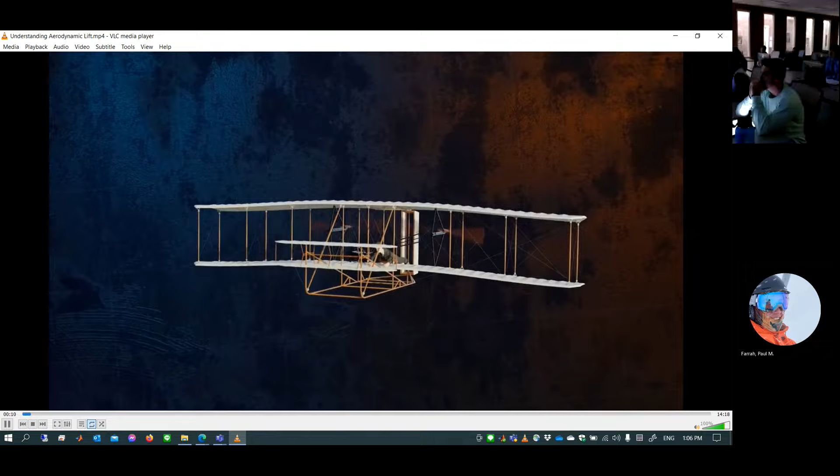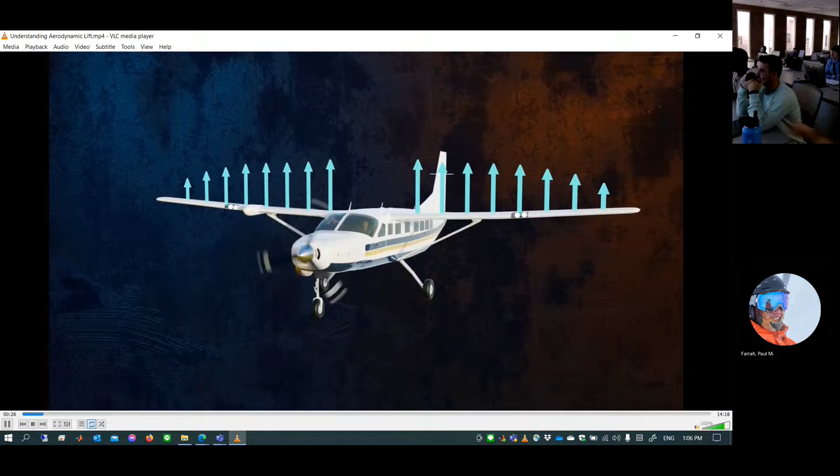Since well before the first Wright brothers flight in 1903, and all the way to the present day, mankind has been fascinated by taking to the skies. Once thought to be impossible, heavier-than-air flight is only a reality because of the lift generated by aircraft wings. But lift is a complicated topic, and even to this day engineers have lengthy debates about how it's created.

So what exactly is lift? When fluid flows past an object, or an object like this plane wing moves through a stationary fluid, the fluid exerts a force on the object, which can be split into a component acting in the same direction as the fluid flow, called drag, and a component acting perpendicular to the flow direction, called lift.

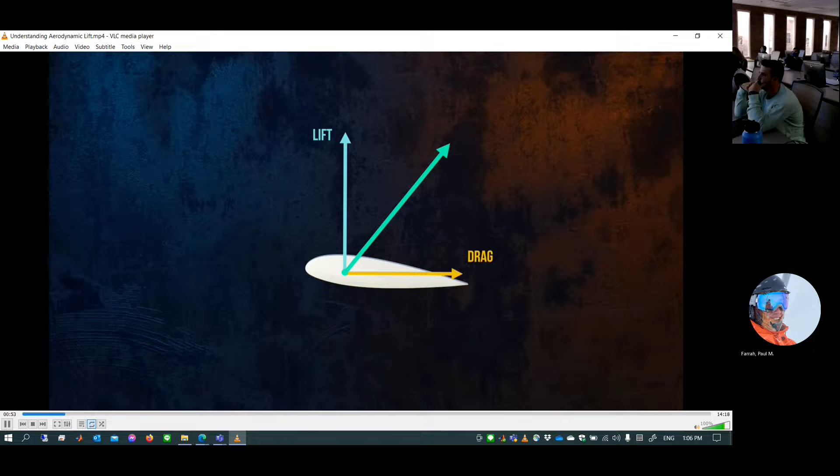When talking about lift, we're mostly interested in streamlined bodies like this airfoil, which are carefully designed to produce a lot of lift, but to minimize drag.

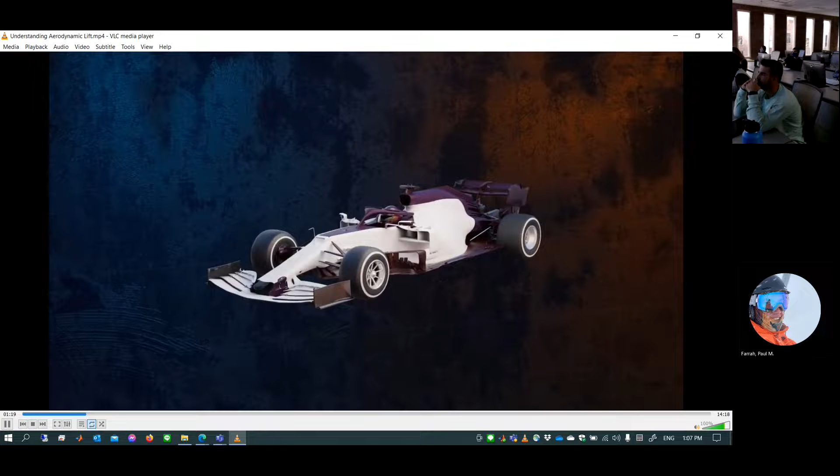Lift-producing airfoils can obviously be found in airplane wings, but also in many other applications, like wind turbine blades or propeller blades. They're also used in the wings of Formula One cars, which are designed to generate downforce so that corners can be taken at higher speeds.

Airfoils come in a huge range of shapes and sizes. One designed for an aircraft wing won't be optimized for a propeller blade, for example. And a wing designed to fly at supersonic speeds will have a very different profile compared to one designed to fly slower than the speed of sound.

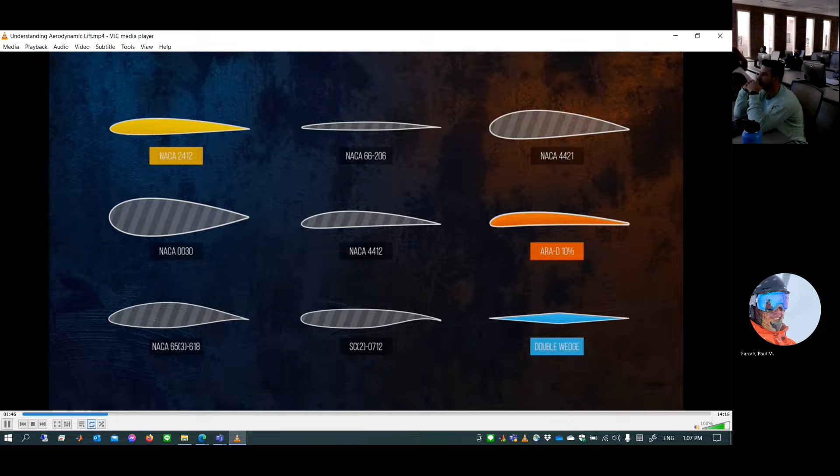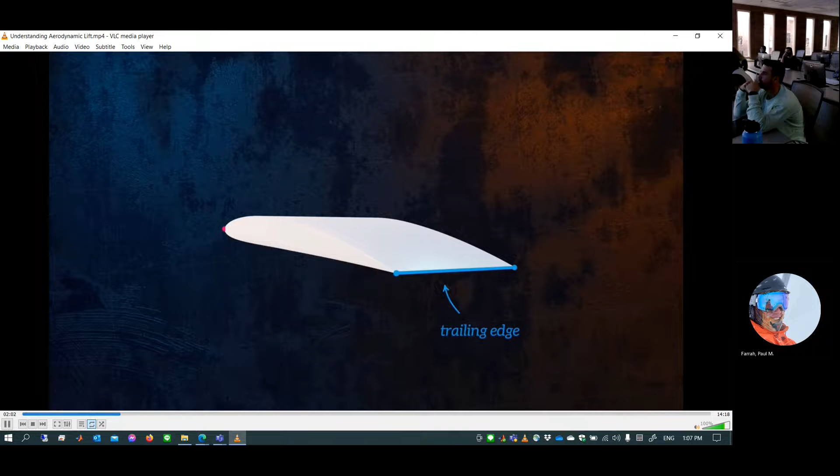Airfoil profiles can be defined using a few different parameters. The forwardmost edge of the airfoil is called the leading edge, and the trailing edge is at the back of the airfoil. Drawing a straight line between the leading and trailing edges gives us the chord line. The angle between the chord line and the flow direction is called the angle of attack.

Drawing a line midway between the upper and lower surfaces gives us the mean camber line. Camber describes how curved an airfoil is. We can have positive camber or negative camber, and a symmetrical airfoil has zero camber. Camber and the angle of attack are important parameters that will have a large influence on how much lift an airfoil can generate.

So how does a humble teardrop shape generate enough force to lift heavy aircraft off the ground? As the fluid flows around the airfoil, it creates two different types of stress which act on its surface. First, we have the wall shear stresses. These stresses act tangential to the object's surface and are caused by the frictional forces that act on the airfoil because of the fluid's viscosity.

Then we have the pressure stresses. They act perpendicular to the object's surface and are caused by how pressure is distributed around it. Lift is the resultant of these two stresses in the direction perpendicular to the flow.

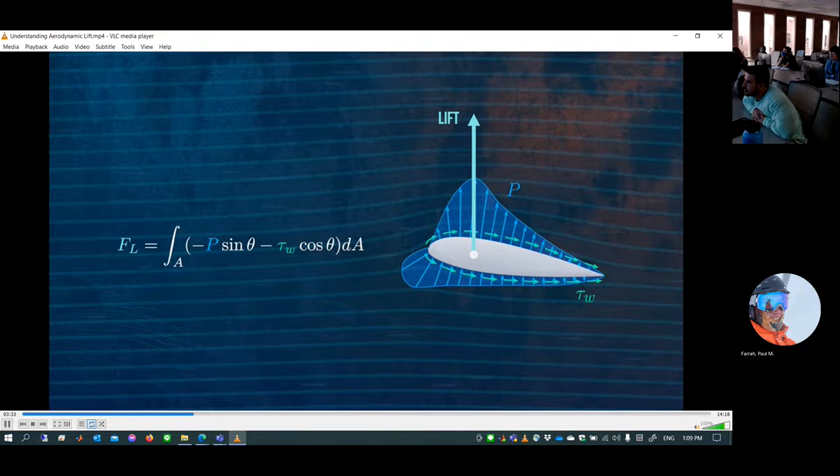The only way a fluid can impart a force onto an object is through these stresses. Integrating the stresses in the lift direction over the surface of the airfoil gives us the lift force. For streamlined bodies like airfoils, the shear stresses will mostly be acting in the same direction as the flow. They will make a large contribution to the drag force, but won't contribute a significant amount to the lift force.

So the suction pressure on the top surface is what contributes most to the total lift force. We can also see that the majority of the pressure difference is coming from the forwardmost part of the airfoil.

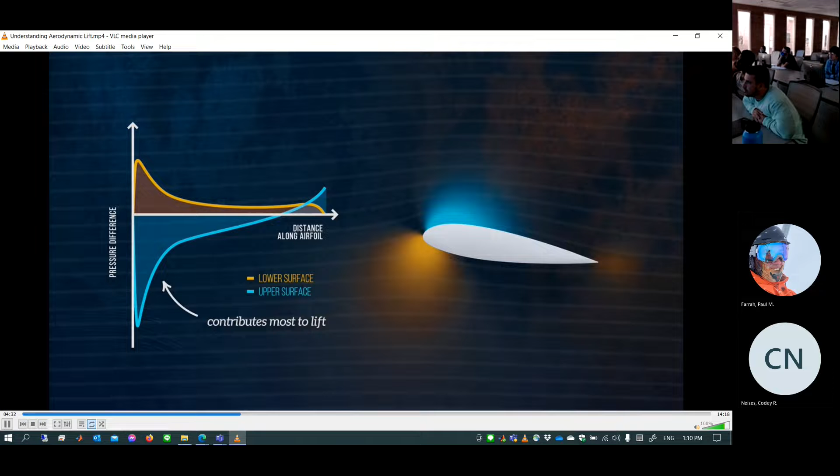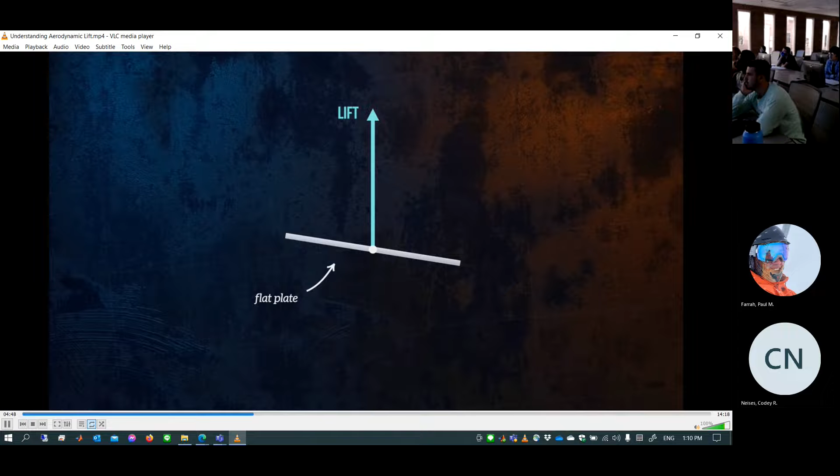In truth, there's nothing particularly special about the shape of an airfoil that allows it to generate lift. Any object that creates an uneven pressure distribution will generate a force in the lift direction, like a flat plate at an angle relative to the flow, for example. Airfoils are just optimized shapes that have been carefully designed to have high lift-to-drag ratios.

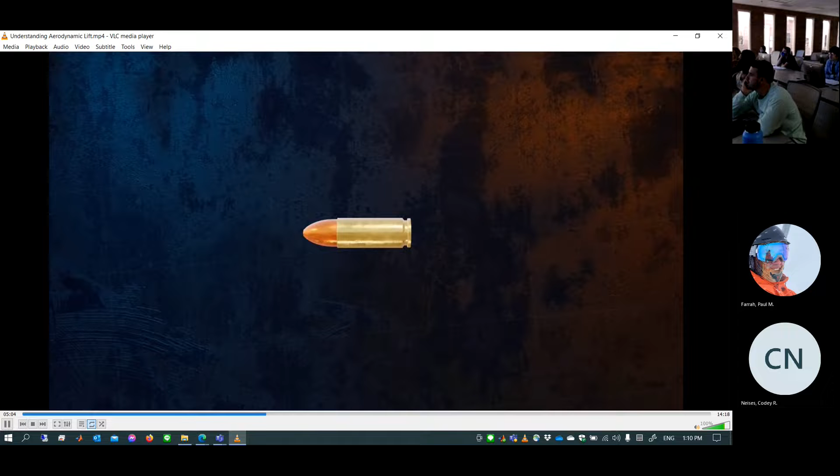Without a difference in pressure above and below an object, there can be no lift. A symmetrical body, like this bullet, doesn't generate any lift force because there's no pressure difference around it.

So we know that lift is caused by the pressure distribution around the airfoil. But where does the pressure distribution come from? The answer to this question is complex, and there's much debate about the best way to explain it in a concise way. We can broadly split the different explanations into two groups, those based on Bernoulli's principle and those based on Newton's third law. Bernoulli's principle explanations focus on the velocity of the fluid.

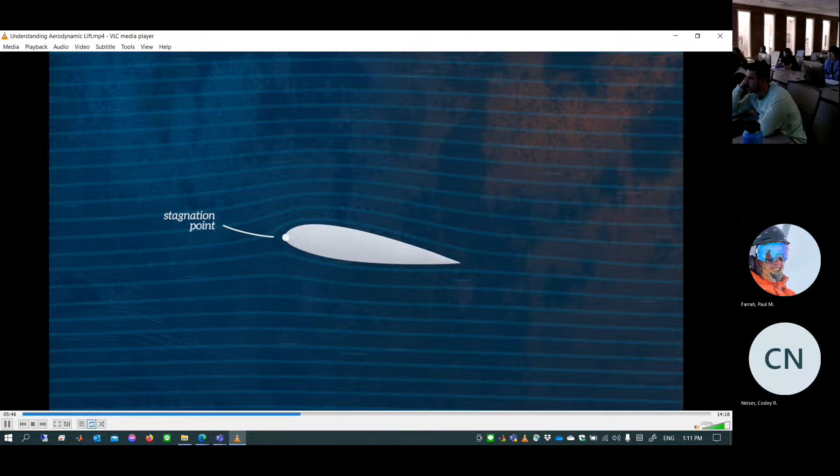If we look at how fluid flows around the airfoil, we can see that close to the leading edge, there's a point where the fluid velocity is reduced to zero. This is called the stagnation point. Outside of the thin boundary layer surrounding the airfoil, the fluid flowing above the stagnation point over the top surface of the airfoil travels faster than the fluid traveling over the bottom surface, as we can see from these particles.

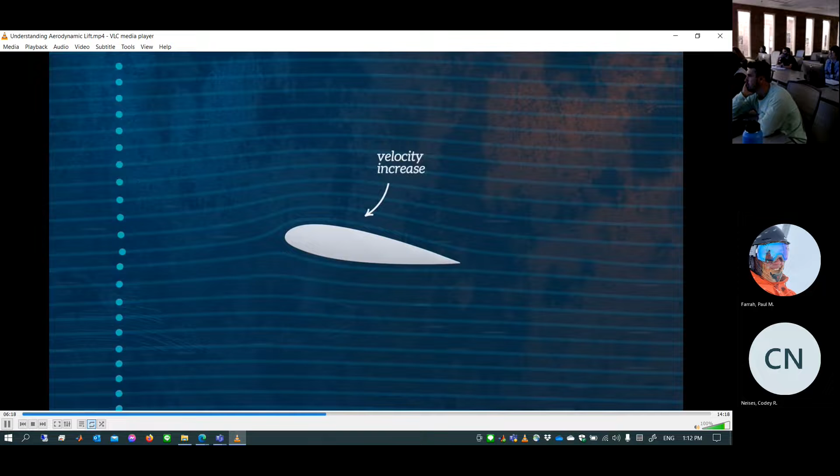Bernoulli's principle tells us that when the velocity of a fluid increases, its pressure must be reduced, which is just a statement of the conservation of energy. This means that the increase in velocity above the airfoil creates an area of lower pressure, and the reduction in velocity below it creates an area of higher pressure, and this pressure difference creates the lift force.

But then, we need to explain what causes the difference in velocity. One explanation is that the geometry of an airfoil causes the flow to be pinched together above the airfoil, but not below it. Because of the conservation of mass, this results in increased velocity above the airfoil.

A more complete but less intuitive explanation for the difference in velocity is based on the concept of circulation. The flow around an airfoil can be thought of as the superposition of idealized uniform irrotational flow and circulatory flow.

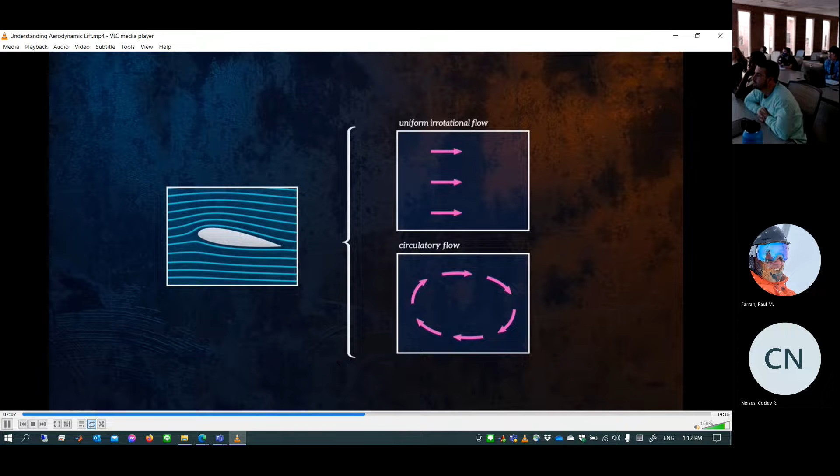If we impose a condition that says the flow above and below the airfoil must be parallel when leaving the trailing edge, we can calculate the exact amount of circulation that must be generated by the airfoil to do this. This is called the Kutta condition.

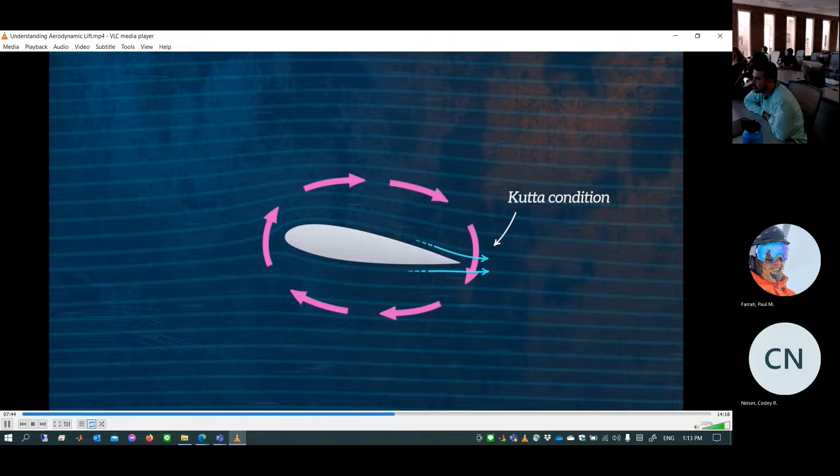Circulation has the effect of accelerating the flow above the airfoil and decelerating the flow below it, which gives us the explanation we need so that we can apply Bernoulli's principle.

What about the explanations of lift that are based on Newton's third law? These don't consider the velocity above and below the airfoil, but instead look more generally at the behavior of the fluid. If we look at a wider area, we can observe that the effect of an airfoil can be felt far beyond its immediate vicinity.

Upstream of the airfoil, the flow is being swept upwards, which is called upwash, and downstream the flow is deflected downwards, which is called downwash.

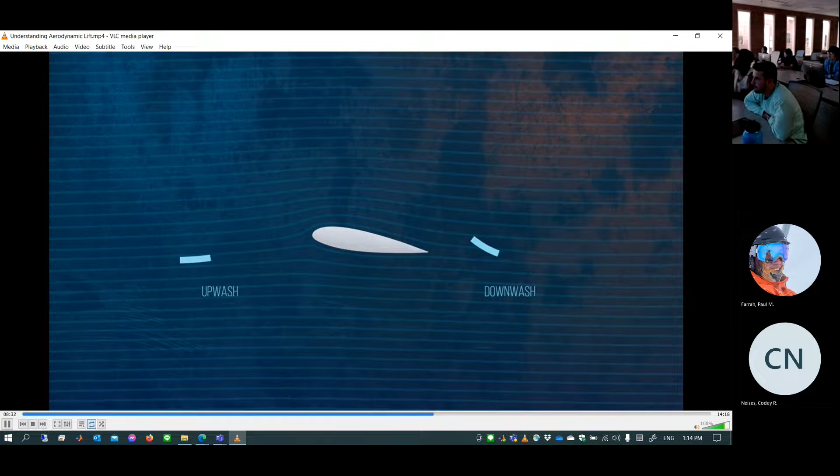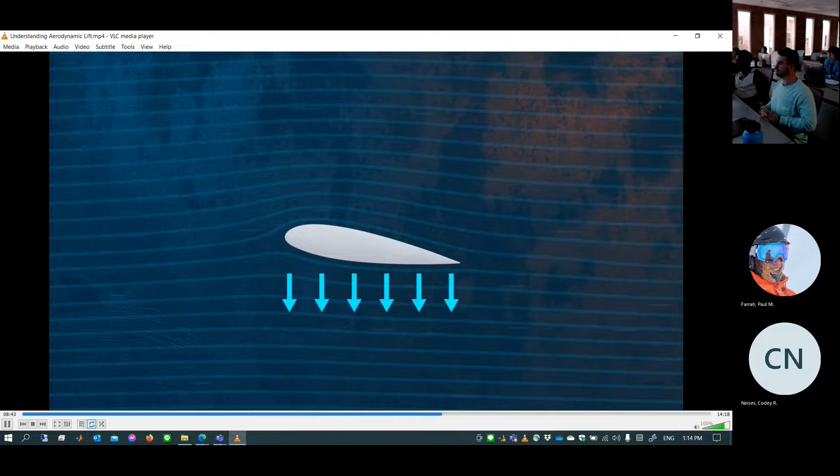A very large volume of air is being displaced by the airfoil. Newton's third law tells us that for every action there is an equal and opposite reaction. The airfoil must be imparting a force on the air to create the downwash, and so based on Newton's third law, there must be a corresponding reaction force acting on the airfoil.

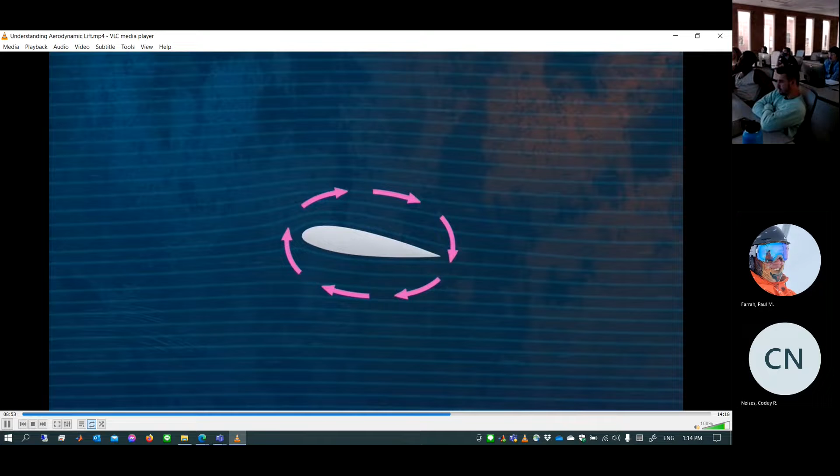We can use the concept of circulation again, this time to explain how the upwash and downwash are created. In summary, a lift force acts on an airfoil because of the pressure distribution around it. The exact cause of this pressure distribution is complex and can be explained in several different ways, which approach the problem from different angles. Explanations based on Bernoulli's principle and on Newton's third law provide valuable insight into how lift is generated, although both approaches have limitations, partly because they're based on cause and effect relationships.

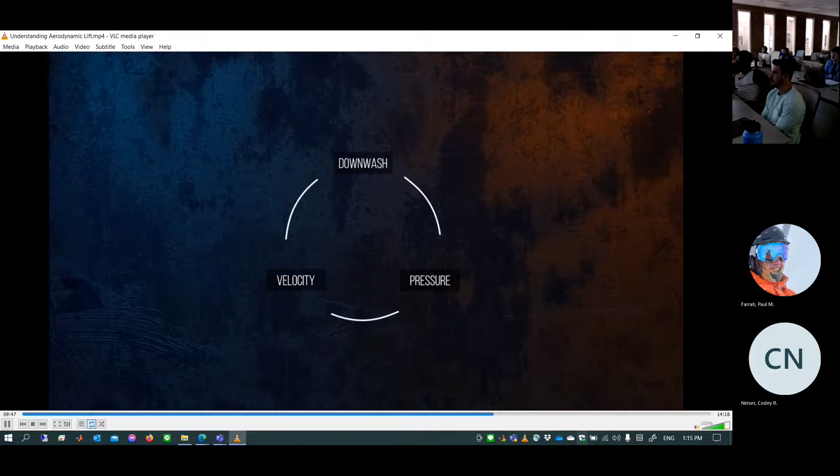The problem is that there isn't always a clear cause and effect relationship between the different phenomena which are involved in generating lift, whether we're talking about the fluid velocity, the pressure distribution around the airfoil, or the downturning of the fluid. In reality, all of these things are happening simultaneously and are mutually interacting.

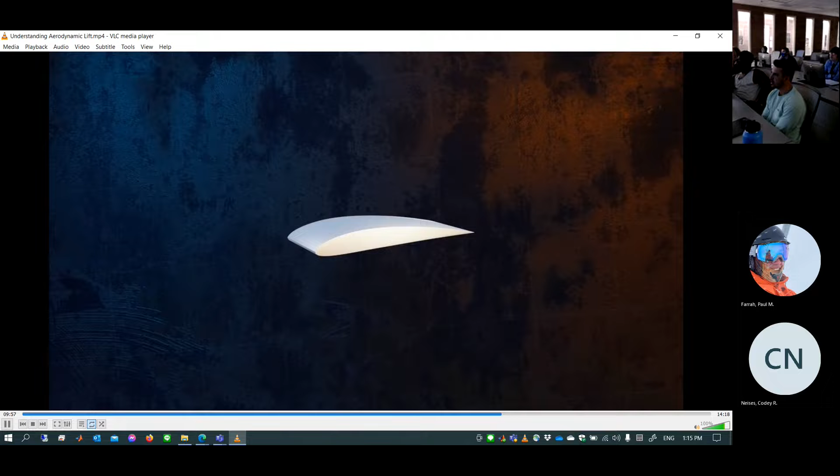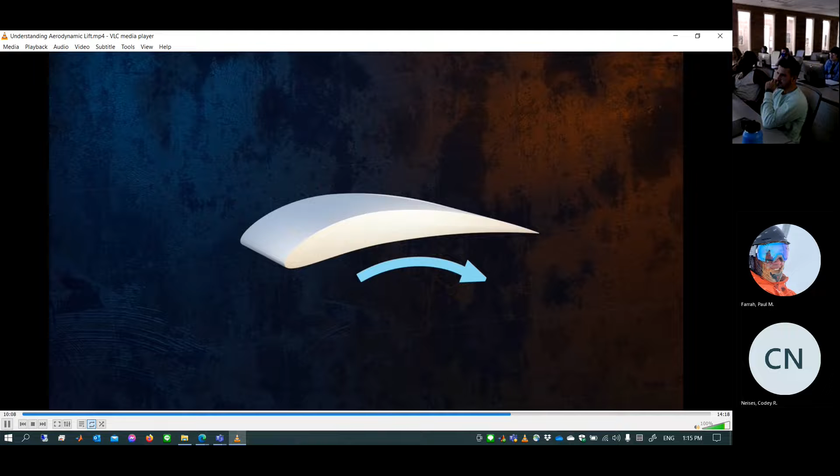Nevertheless, these explanations are useful and can lead to a more intuitive understanding of lift. We can easily imagine, for example, that increasing the camber of an airfoil will allow it to deflect a larger amount of fluid, and so will increase the lift force. The same is true for the angle of attack. Increasing the angle of attack deflects more fluid and increases lift. However, there are limits to this logic. Once the angle of attack reaches a certain critical value, we can observe a sudden decrease in the lift force.

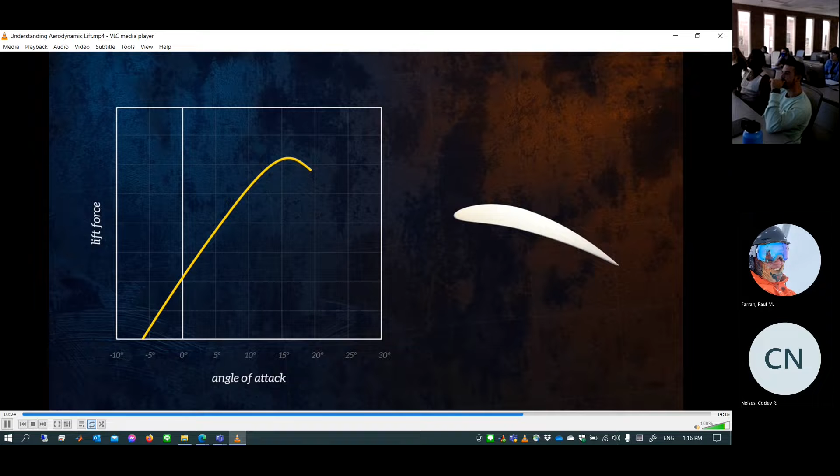For this airfoil, it occurs at around 16 degrees. At this angle of attack, the boundary layer is no longer able to remain attached to the airfoil, and it detaches from the surface, creating a wake behind it which affects the pressure distribution around the airfoil, significantly reducing lift and increasing drag. I covered flow separation in detail in my video on aerodynamic drag. The sudden reduction in lift is called stalling, and it can be very dangerous for aircraft.

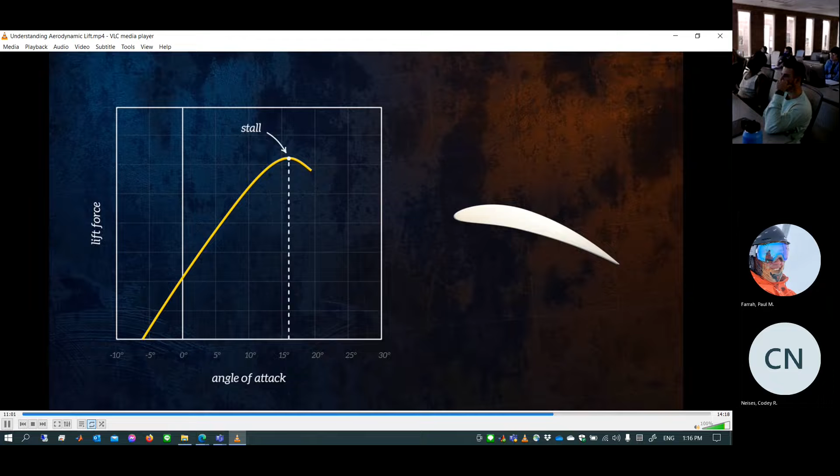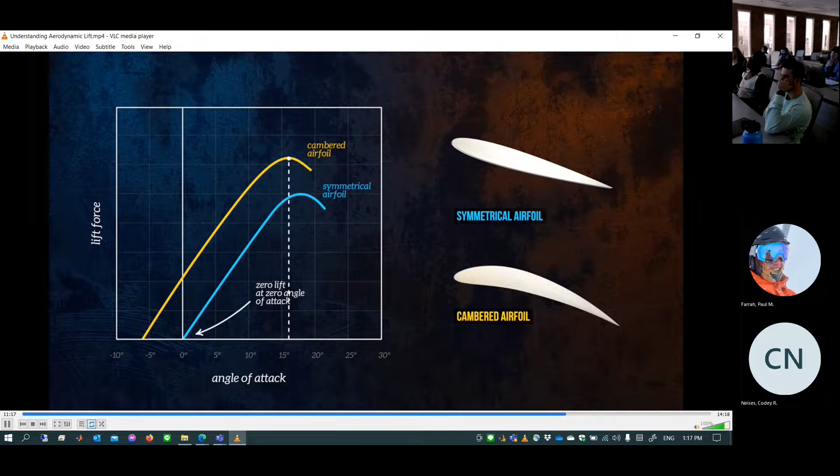Different airfoil shapes can have drastically different lift characteristics. This airfoil is cambered. If an airfoil is symmetrical, and so has zero camber, the lift force will be 0 for 0 angle of attack. Aerobatic aircraft usually use symmetrical airfoils since they allow planes to fly upside down more easily. Lift is generated by lifting the nose of the plane to create an angle of attack.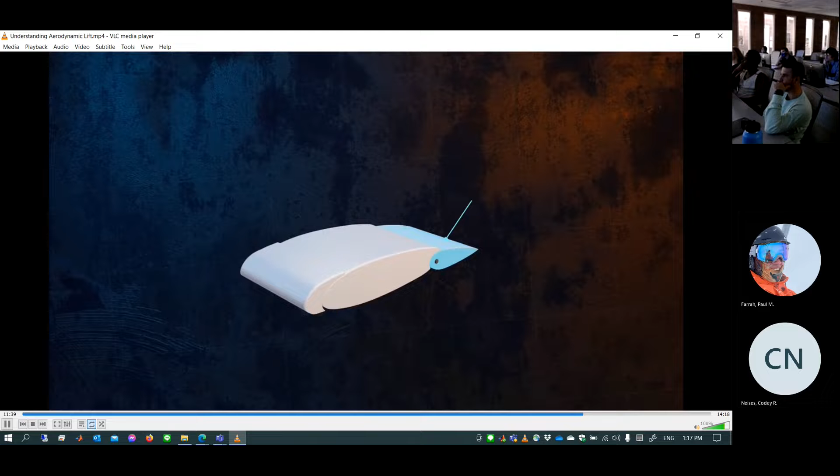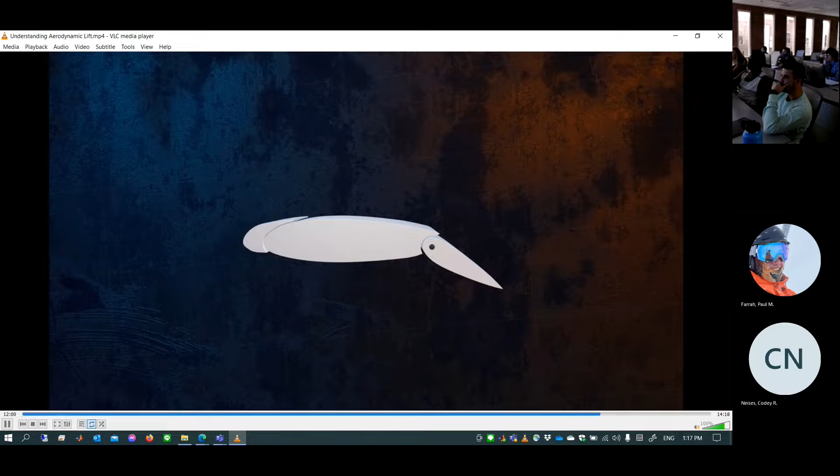Modern aircraft wings are equipped with flaps and slats, which allow the shape of the airfoil to be adjusted and optimized for different phases of flight. During takeoff, for example, you want high lift. Extending the flaps increases the camber of the wing, which increases lift, and so flaps are extended during takeoff. But the extra lift comes at the expense of increased drag, and so the flaps are retracted when cruising, since high lift is no longer needed, and drag should be minimized to improve fuel consumption.

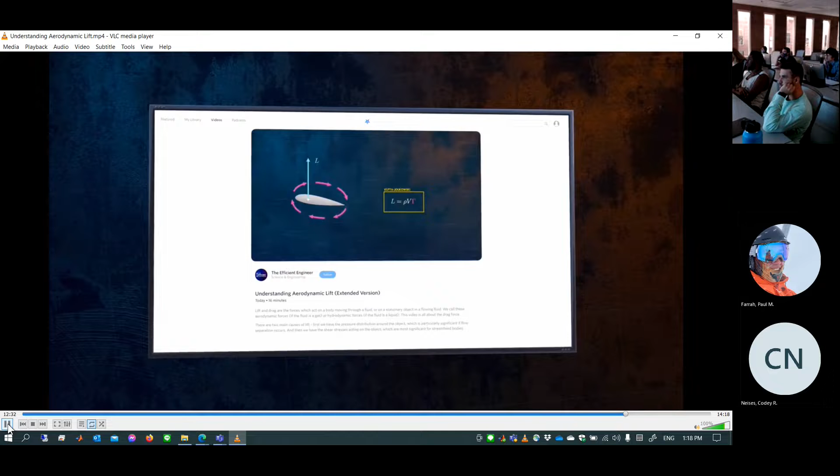Vortex shedding at the startup and also Kutta condition, all of those mathematical details that this video actually started to kind of discuss about. So this actually covers some foundation. We are going to get into a little bit more detail in a mathematical sense. So knowing the basic foundational discussion is actually better to understand deeper later as you go into math.

Question, go ahead. Yeah, for the slats, do they move? They move over. Eh? Slats. The slats, yeah. It just creates a gap here. It's a leading edge device, it's called slats. We're gonna cover that, don't worry about it. Just stay tuned.

Okay, alright. So somebody actually joined in the middle. I forgot to make my status do not disturb. Yeah, sorry.

Okay, so we are going to start talking about circulation. Circulation came up in the video, right? Circulation is essentially a tendency of changing the direction of the incoming uniform flow because of the presence of your body. This body is typically called an airfoil, cross-section of the wing, and also typically comes with an angle of attack. Those two combinations actually have circulation introduced in the flow field. That circulation is going to create the lift.

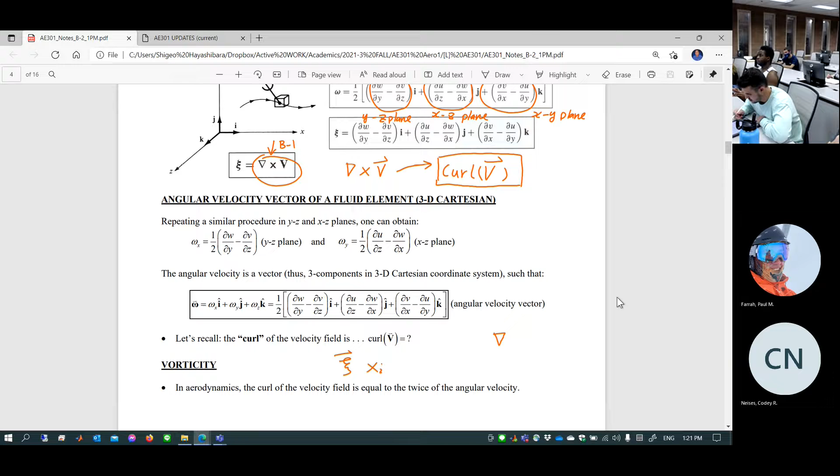So suppose the velocity field information is all given - you're going to mathematically take the curl of the velocity field. It's called the vorticity. We know that, do you remember last class? Yeah, vorticity - this is vorticity, del cross V, curl V. This is essentially information you can get from the flow field, which is the velocity field. If the velocity field information is given mathematically, a complete description, you can determine the vorticity. Once you know the vorticity, you can determine the circulation.

However, we want to avoid that kind of discussion, because vorticity can be zero. If the vorticity is zero, what do you call that flow field? Irrotational - it's called an irrotational flow field. So we want to simplify this equation, assuming that the flow field is irrotational. In other words, we are going to completely ignore the viscosity. It's called an ideal flow field.

So if the ideal flow field is concerned, the circulation of the flow field can only be given by the line integral, not the area integral, because vorticity is zero. If the vorticity is zero, if you try to integrate zero over the area dS, what do you get? Not zero - some kind of constant we cannot determine. It's indeterminate. If you integrate zero, that is indeterminate. You need extra information to determine that constant. That constant could be zero, but we never know. It's an indeterminate integral here, if it's an irrotational flow field.

So we're going to usually do the mathematics of the line integral, velocity dot product dS, line integral. So this is going to determine the circulation of a flow field.

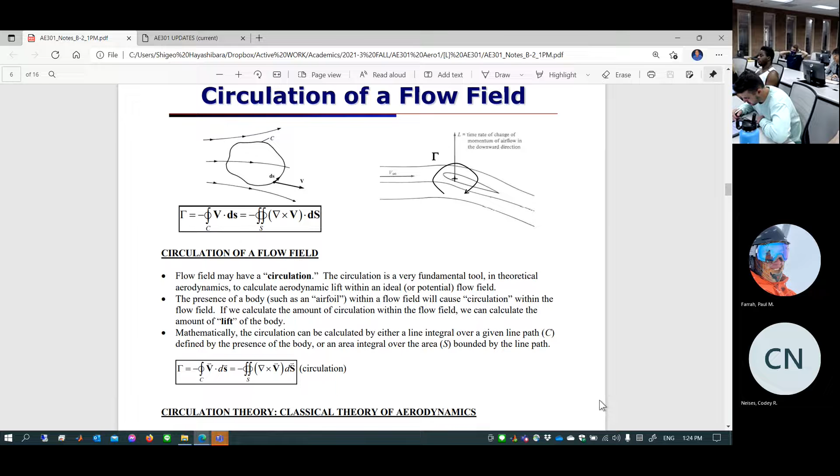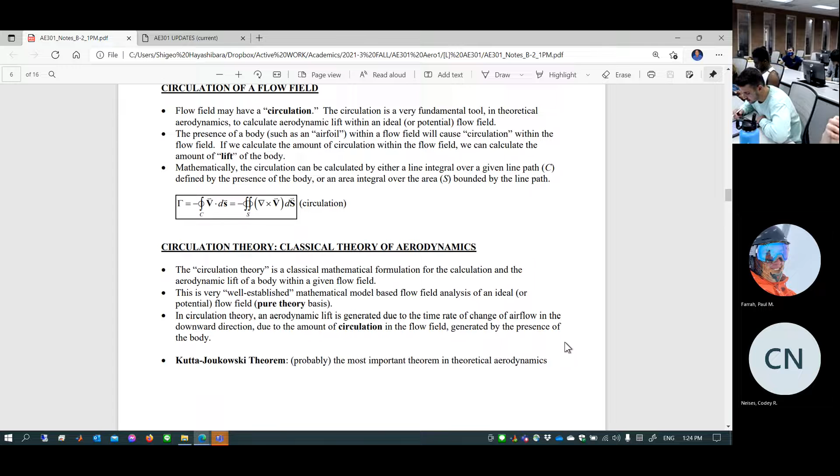So knowing that you can compute the circulation of the flow field mathematically, what is the next step? The next step is the Kutta-Joukowski theorem. In other words, based on the circulation you compute in the flow field, you can determine lift. Next page - this is the Kutta-Joukowski theorem, a very simple equation. Surprising, eh? This is how lift can be generated if you know the circulation of the flow field.

So this is lift per unit span. How much lift you can generate per unit span of a cross-section of a wing, called an airfoil, is equal to density times V infinity, the uniform flow, multiplied by circulation. Those two combined together give you a flow field with lift. This is called the Kutta-Joukowski theorem - a very simple theorem, the most important equation of aerodynamics, which you've seen in the video, right? Okay.

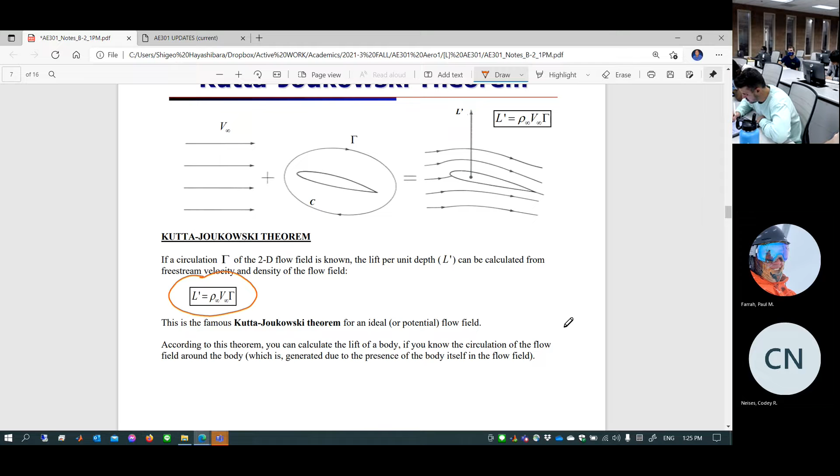This is called the classic circulation theory of Prandtl, German origin — the theory of aerodynamics of this country. So we are going to combine Bernoulli's principle plus Newton's third law of motion interchangeably, trying to explain how circulation generates lift. That is what the software is all about.

XFLR5. This software uses that theory. This is the circulation theory of aerodynamics. So this hopefully gives you the reason why an airplane generates lift.

Knowing why is important. Otherwise, unless you know why, you can never predict anything new. It's not that the airplane pilot says, well, we know how to fly an airplane — that doesn't mean you can design and modify and make it better, because you can only do reactive things, trial and error. That's not design at all.

If you're talking about airplane design, you're going to analyze it based on theory. That means you need to understand every single detail of aerodynamic theory. Otherwise, you are not qualified to be an airplane designer. You can be a worker, but you cannot be an airplane designer — those are two different job categories.

So please, as long as you're taking my aerodynamics course, I hope you understand everything that I'm going to cover. This is going to be based on the theory of aerodynamics, the circulation theory, okay?

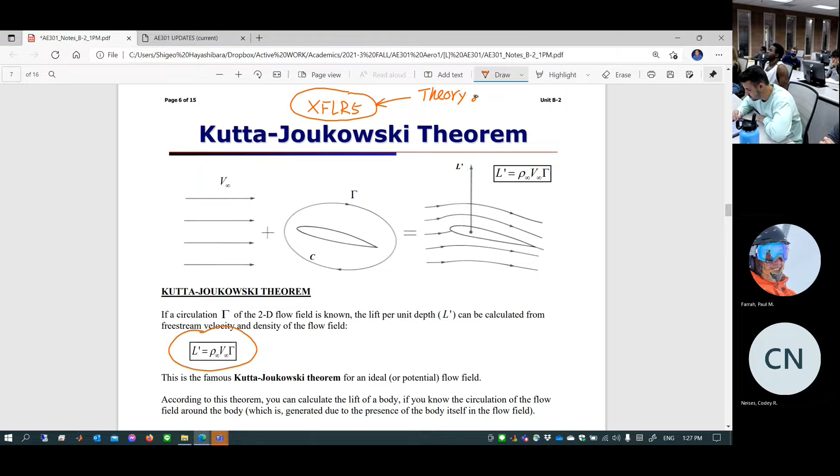So this XFLR5 was developed based on Xfoil. Xfoil is a software developed by a professor at MIT, Professor Mark Drela. Later on, a group of people combined Xfoil into a batch processing system so that this software runs cases of Xfoil at different conditions, different Reynolds numbers, different angles of attack, batch processing lots of data sets, creating a database of 2D cross-section behavior, and then using that to design your wing.

So your wing is created by this section, that section, that section — could be three different shapes, could be three different angles of attack and angles of incidence. There could be lots of modifications you can do. But as long as you know the behavior of each cross section, it's essentially integration from tip to tip — that's your wing's 3D behavior.

You can predict this only through the software. You can never do it by hand. So before this software was introduced, a senior design project aerodynamics person's job was essentially trial and error. That's the only thing you could do.

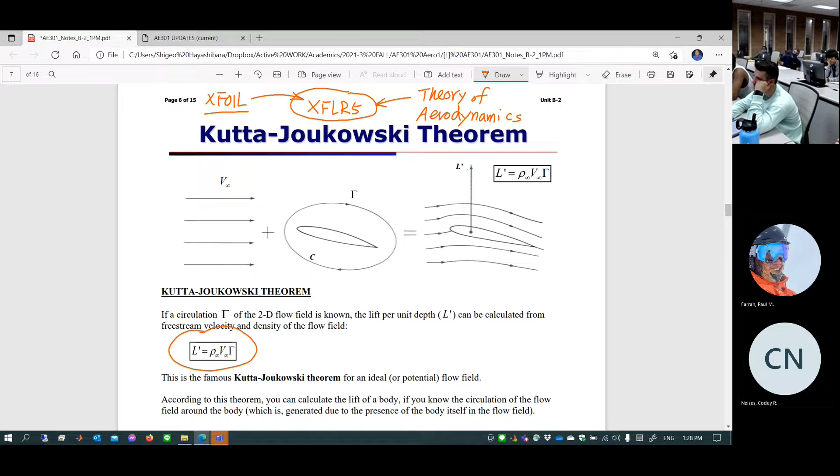Nowadays, you can analyze and present your analysis, and then based on your analysis, you can optimize your wing shape. If I were to teach senior design capstone, at least I want to see that kind of analysis. If that kind of analysis isn't done, I'm not going to call that airplane design, so seniors couldn't graduate — that's what I would say. Now, I'm not teaching senior design, so I don't know what other people say.

But anyway, let's take a look at an example here — try to find the circulation of this very simple flow field. This is just a demonstration of how mathematically you can determine the circulation of a flow field. This is going to be a precursor to your project 2A and 2B, where you're going to deal with flow over a circular cross-section — flow over a circular cylinder.

That's your upcoming project. So this is like an introductory demo of how to handle the mathematics of flow over a circular cylinder. Obviously, what kind of coordinate system is better to handle this kind of math? Polar coordinates. Here we go — so we are going to use polar coordinates to do a line integral to determine the circulation of this flow field.

Now, wait — is this a polar coordinate velocity? Wait a minute, velocity is given in some kind of coordinate. What's this? This is a Cartesian x and y coordinate based velocity profile. Do you want to integrate it as is? No.

Oh, do you want to do this? How? I mean, you could possibly do it using MATLAB. You can do it, but by hand, do you think you can do it? So the first question is, what kind of velocity field is this?

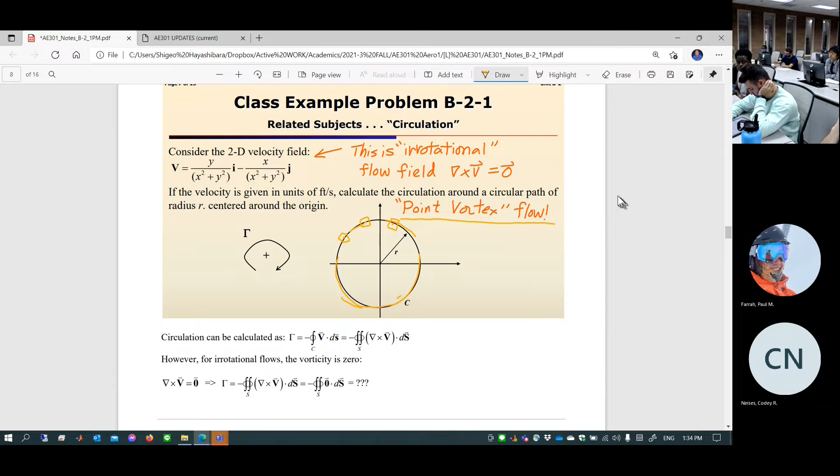You are going to be given this in Unit B3. Wait until you see it, but we're going to analyze it later mathematically. Okay.

Let's find out the circulation here. So this is the equation for circulation. You're probably dealing with it right now in Unit B1. Which equation do you want to choose? One of them is not valid. First one: so this one, you cannot do this because del cross V is 0.

If so, circulation is negative integral over the closed surface S of the vorticity, del cross V, which we know is 0, dot product with the area S. This is what? The answer is some kind of constant, indeterminate. The only thing we know is this is a constant. It could be 0, it could be non-zero, but we never know. It's an indeterminate integral.

Okay. So we cannot use this equation. We can only use this line integral. So let's just do the line integral. Okay, so first thing first, you don't want to deal with Cartesian coordinates.

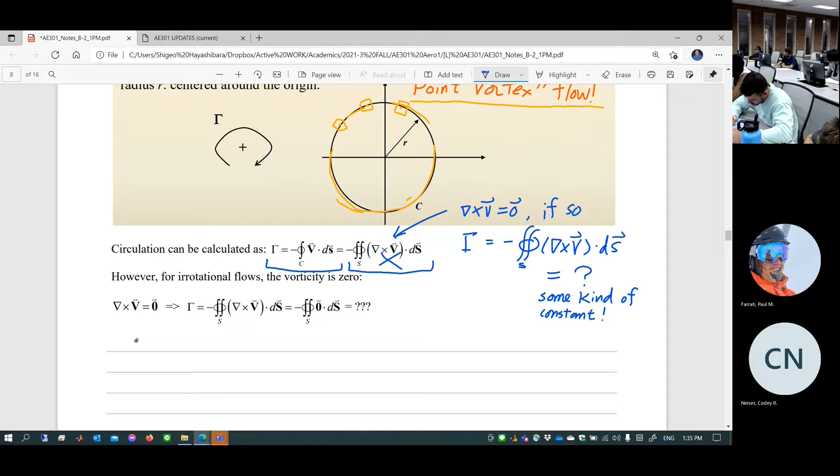You want to convert this into polar coordinates. So this is the given velocity field. Velocity V is equal to ui plus vj. This is a Cartesian-based velocity that's given. So you are going to completely transform this into polar. So in polar coordinates, velocity can be represented by what?

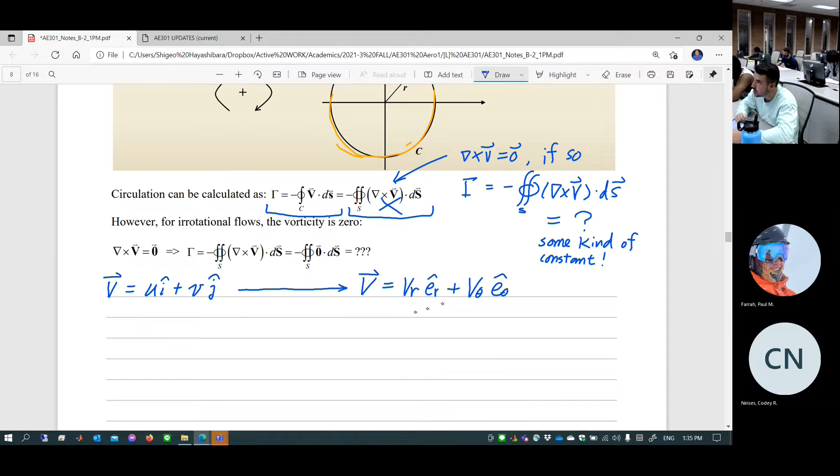Velocity in the radial direction component and velocity in the tangential direction component, right? You have to do a complete transformation of coordinates. Do you know how to?

If you're working on a circle... well, there's a transformation equation coming from Unit B1. Do you guys know that? Please tell me if you know. Okay, so velocity u is y over x squared plus y squared. Velocity v is equal to negative x over x squared plus y squared.

Yeah, that's right. So what is the transformation equation? This is... oh, u is equal to... u equal to sine theta over r. So it'd be r cosine, or r sine theta over r squared. Where did you get that? Isn't y equal to r sine theta? Okay, polar coordinate. So you got it from Unit B1?

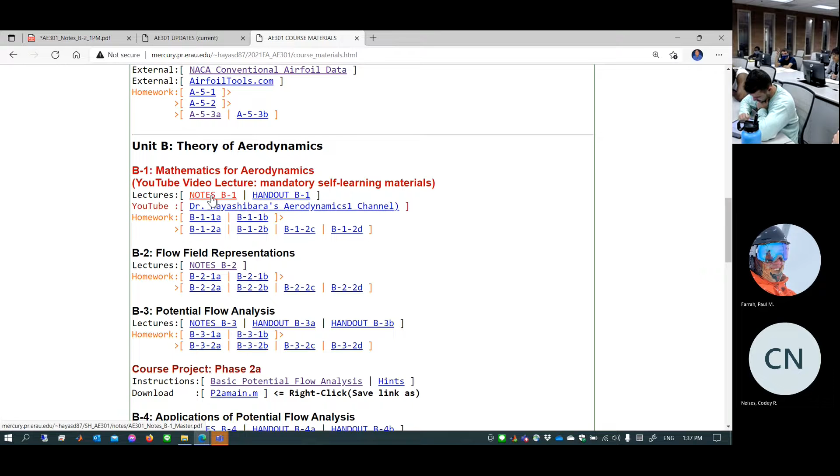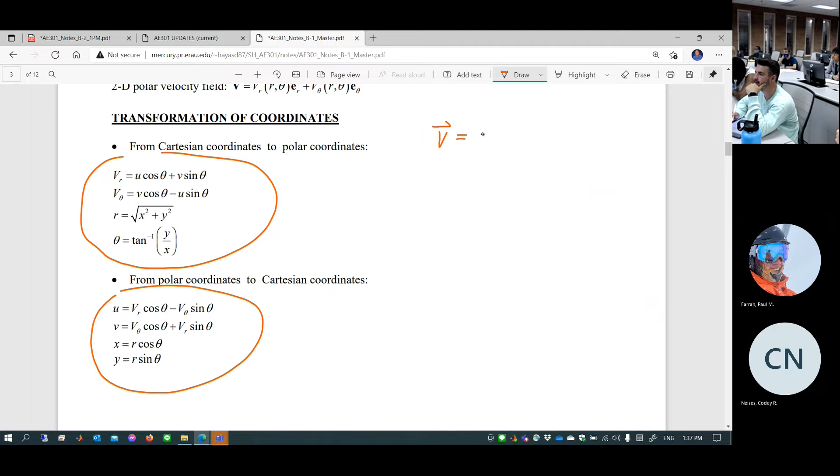From Cartesian coordinates to polar coordinates, you have to go through a series of steps. Originally velocity is given in Cartesian: velocity u is a function of x and y, and velocity v is also a function of x and y. Then you want to completely transform into velocity vr, a function of r and theta in direction er, plus velocity v theta, a function of r and theta in direction theta. That's basically the transformed equation of the velocity field, starting from the original xy Cartesian equation and arriving at this.

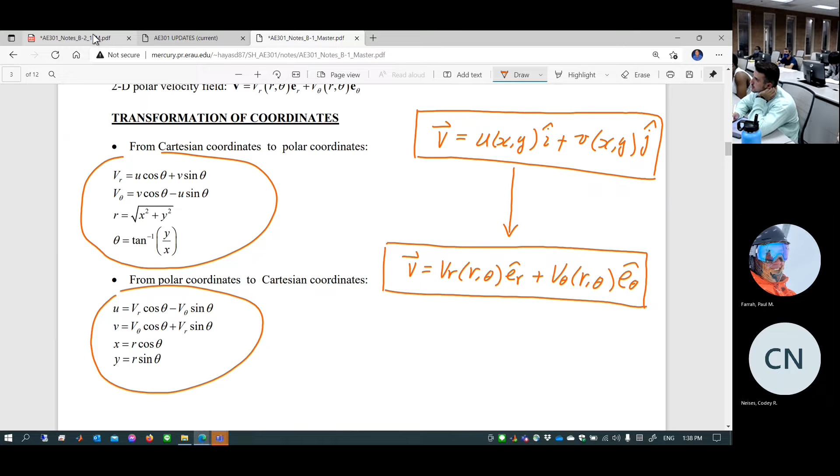Let's do that. This is again given in unit B1. I hope you're working on it. Let's go back to this note and apply what we know.

So x equals r cosine theta, and y equals r sine theta. X squared plus y squared equals r squared. Starting from here, u is equal to... y is r sine theta, x squared plus y squared is r squared, so you can cancel one of the r's here, this r and that r cancel.

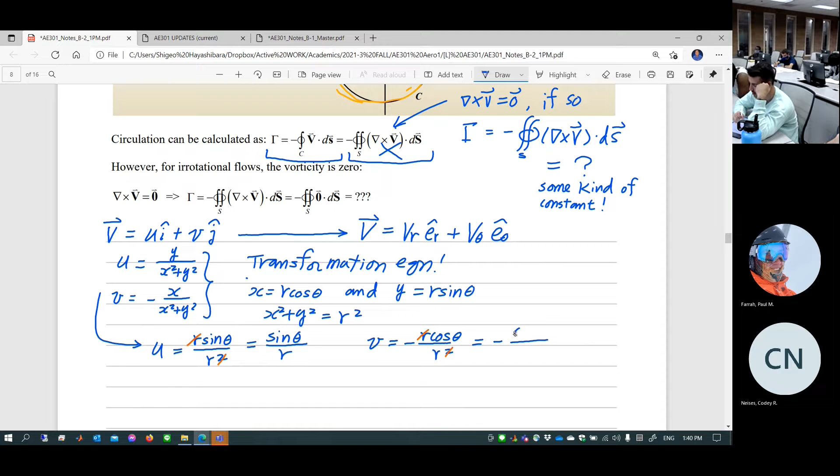So u is equal to sine theta over r. And v is equal to minus x, where x equals r cosine theta, divided by x squared plus y squared which is r squared. One of the r's cancels, this and that cancel, then this becomes negative cosine theta over r. Okay, so far so good.

This isn't done yet, because what we want is velocity vr. Velocity vr equals u cosine theta plus v sine theta, which equals, u is now sine theta over r, multiplied by cosine theta, plus v is now minus cosine theta over r multiplied by sine theta. So what is this? What is vr? This is actually zero—it cancels everything, so there's no velocity in the radial direction component.

So velocity in the radial direction component is zero. What kind of flow field is this? This kind of flow field, where velocity is always this way, not this way—it's called vortex flow. You can tell now just by looking at it. Okay, so far, making sense?

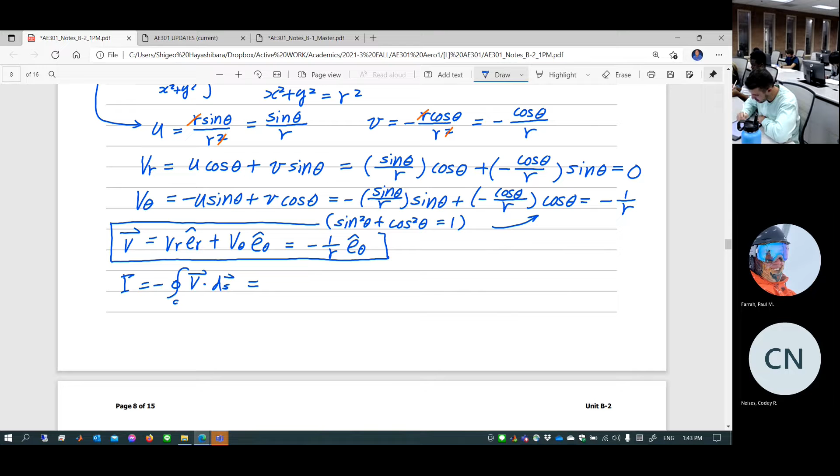So you want to integrate over this closed loop path C. In terms of theta, this goes from theta equal to 0 to theta equal to 2 pi. Now we are talking about the polar coordinate system—this is the direction r, this is the direction theta. Theta equal to 0 all the way to 2 pi over the radius r. So along this path, let me just zoom in a little bit.

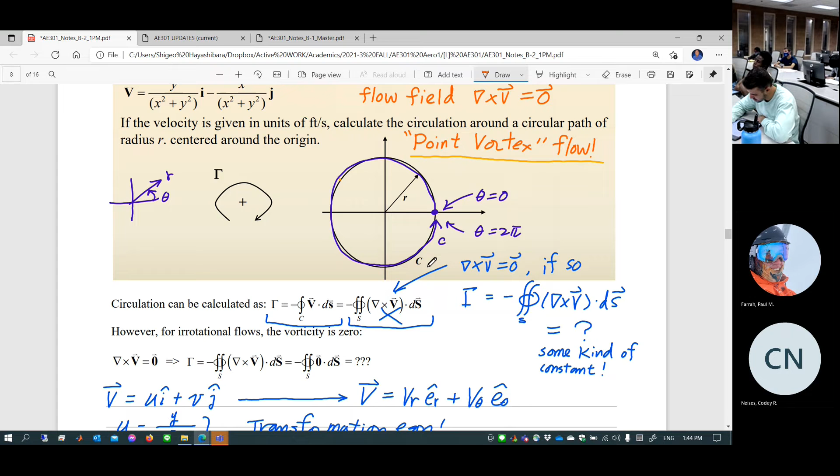Zoom in a little bit. So you are going to introduce a very small, tiny angle d theta. This is d theta. And this is something called ds. By the way, ds is a vector, isn't it? What kind of vector is that?

Line vector ds - what kind of vector is this? This is the direction tangent at each location. The magnitude is ds, which is arc length. So what is this arc length? ds is equal to r d theta. That's right, that's what Paul was talking about. So this line vector has magnitude r d theta, direction tangent at each location.

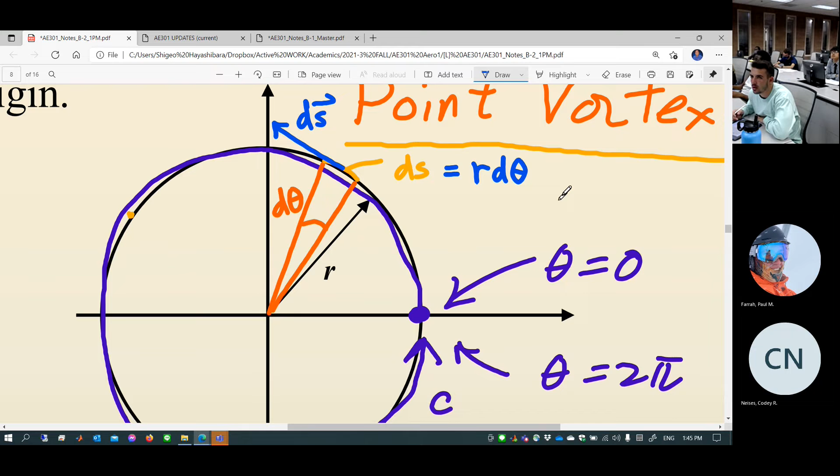So knowingly, you're going to integrate. This equation can be represented by negative integral from theta equal to 0 to theta equal to 2 pi. Okay, 5 more minutes.

Velocity is this, right? Velocity is minus 1 over r, e theta. That's the velocity. Take a dot product, you guys know dot product. What is ds? We just found it: r d theta, direction e theta, right? So this is velocity v, this is ds, it's just 2 pi. So take a dot product.

And then finish up. What do you have? 2 pi. So this is going to be negative integral from 0 to 2 pi. If you take a dot product, what happens? You just take the magnitude: minus 1 over r multiplied by r is 1, and the minus minus, so this is d theta. Actually plus, yeah. The minus goes away also, so this is integral from 0 to 2 pi d theta. What is it? This is 2 pi. In terms of units, this is going to be feet squared per second. So this is called the circulation of this flow field.

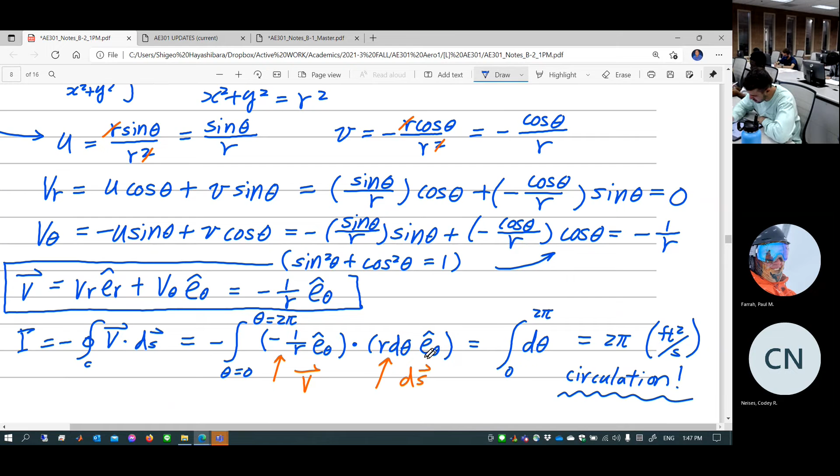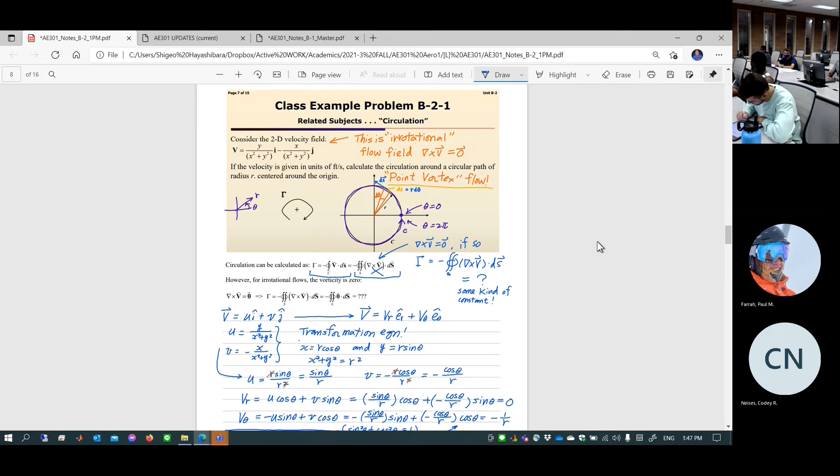So you can mathematically determine and calculate the circulation of a flow field if velocity information is given to describe the flow field. This is something the software actually does, and you're going to actually start using that software toward the end of the semester.

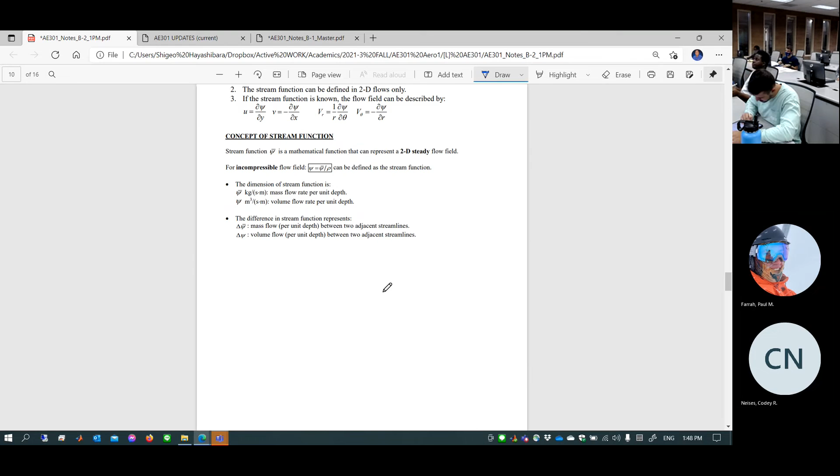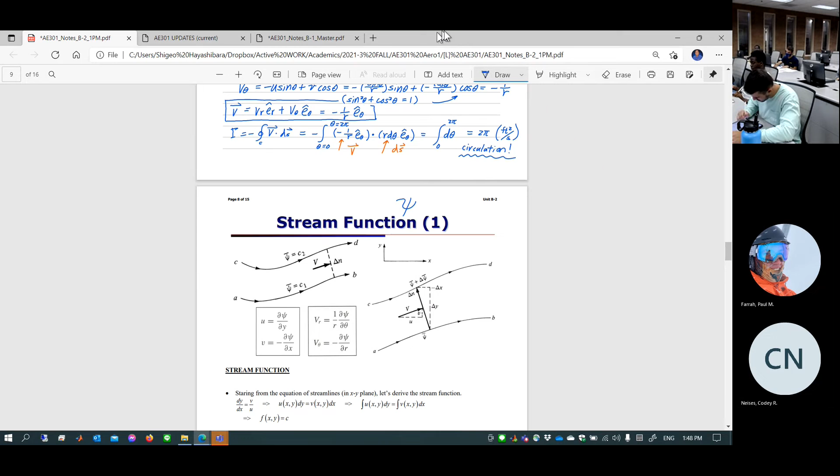This is phi. Some of you actually use this to represent 0 - you have a habit of using this to represent 0. I'm talking about you, Heidi. No, let's stop it, okay.

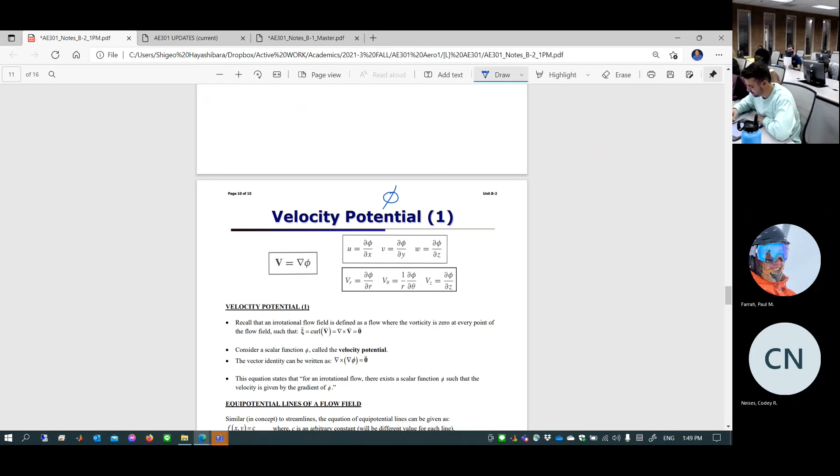Yeah, it's based on the expansion, but what you're doing is you're taking a small angle over the entire angle. So you're still taking small angles, so it's fine. Do you have any questions?